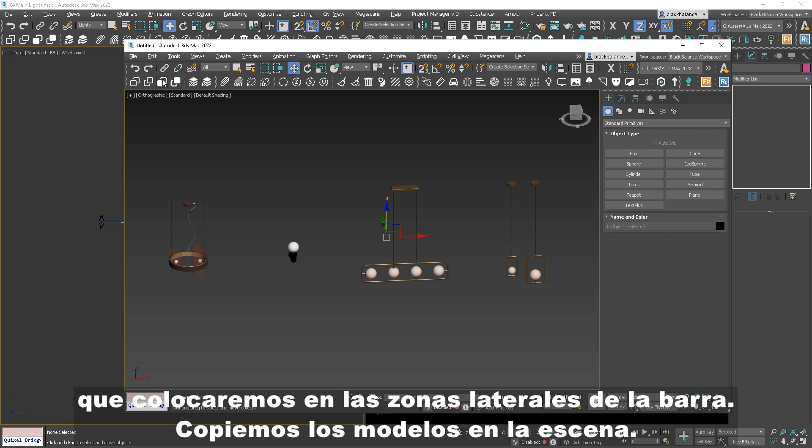So basically, we have the pendant lamp that will be placed above the sofa sets, the wall lights for the columns, and two other pendant lamps that we will position in the side areas of the bar. Let's copy the models into the scene.

First of all, let's make sure we have the light models on a separate layer. We can call it fit_lighting.

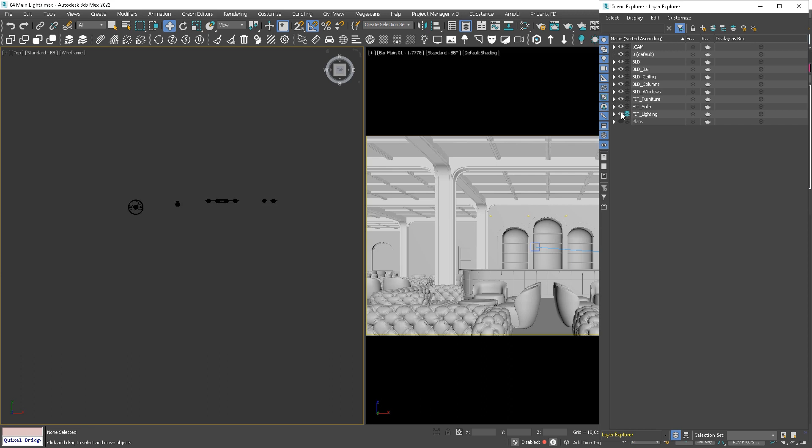Okay, let's start with the pendant light. We'll position it above the sofa set. Remember, it doesn't have to be exactly in the correct place if it's not visible. More important is to position it so it looks right on the camera and according to the composition rules.

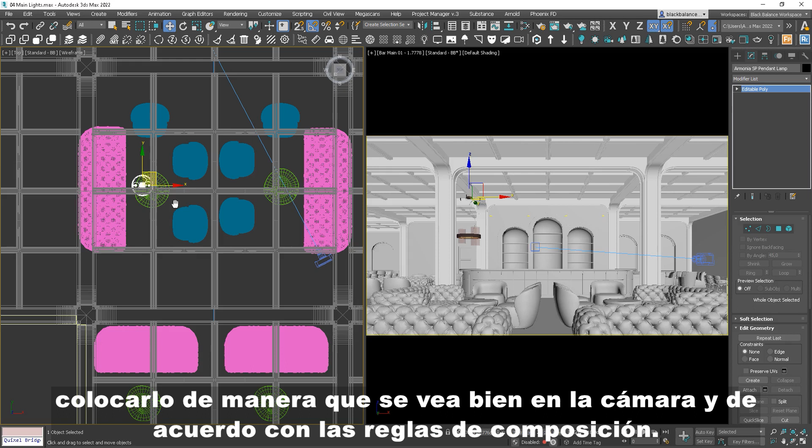Also, I like the height of the pendant lights, so I will leave it as it is. Later I will remodel them a little to go up to the ceiling. I think it looks good somewhere around here. It's nice if we have the effect of layering in the image - it looks more realistic then.

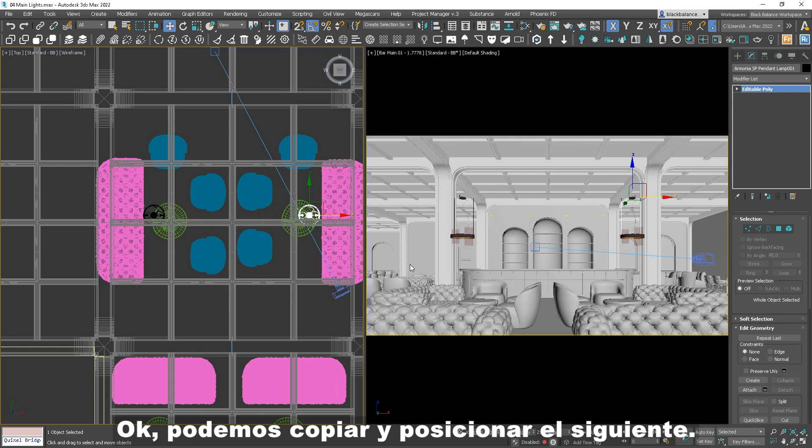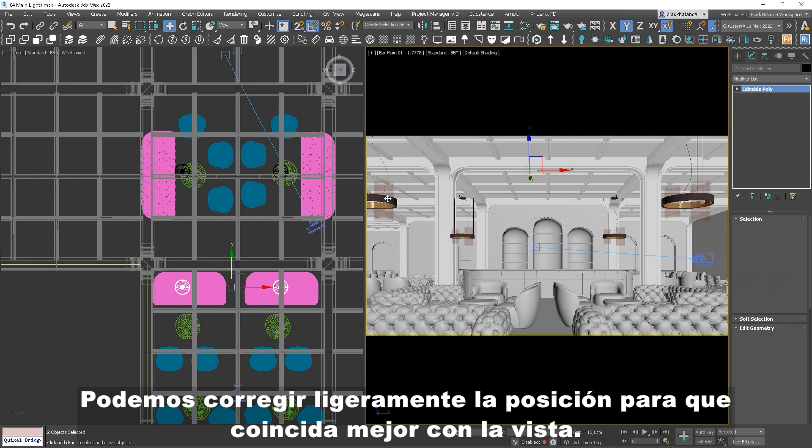Okay, we can copy and position the next one, and we can copy these two above the other sets. We can slightly correct the position to match the view better.

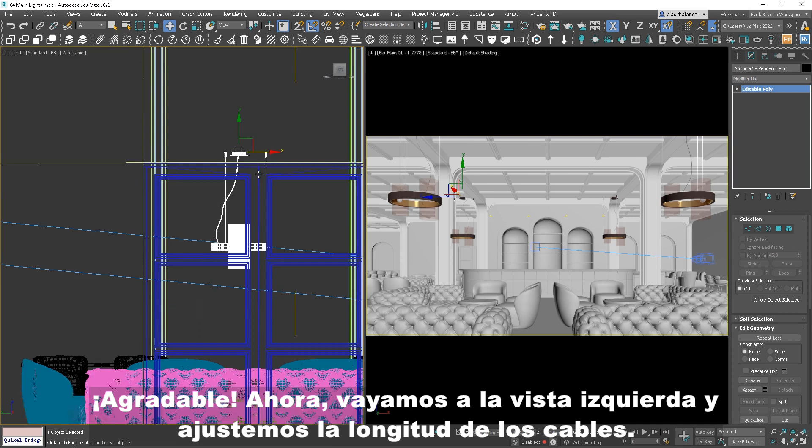Nice. Now let's go to the left view and adjust the length of the cables. I will use soft selection and move the vertices up to the ceiling. Just let me check which line here indicates the ceiling.

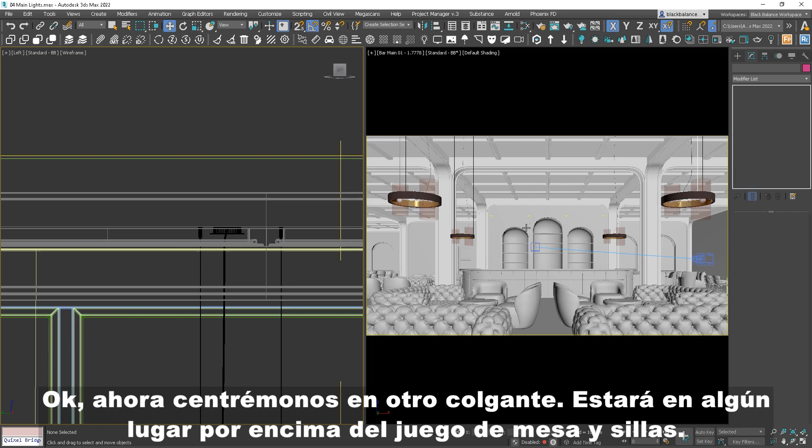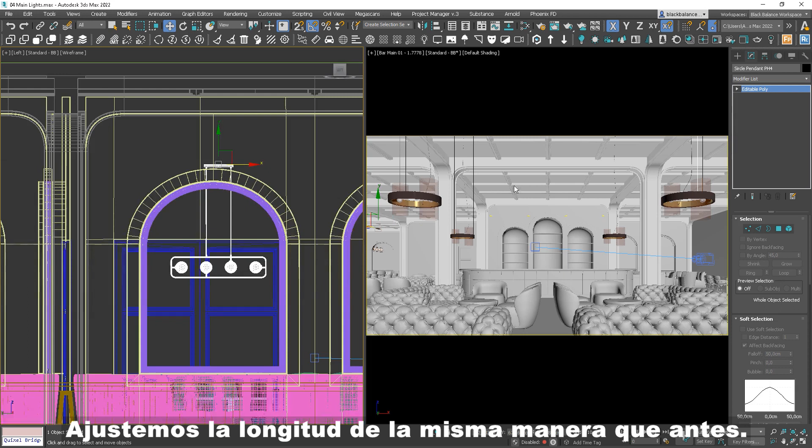Okay, now let's focus on another pendant. It will be somewhere above the table and chairs set. I will position only one of these models, as in the next lesson we'll add lights to it and copy all of this around - it will be quicker. Let's adjust the length the same way as before.

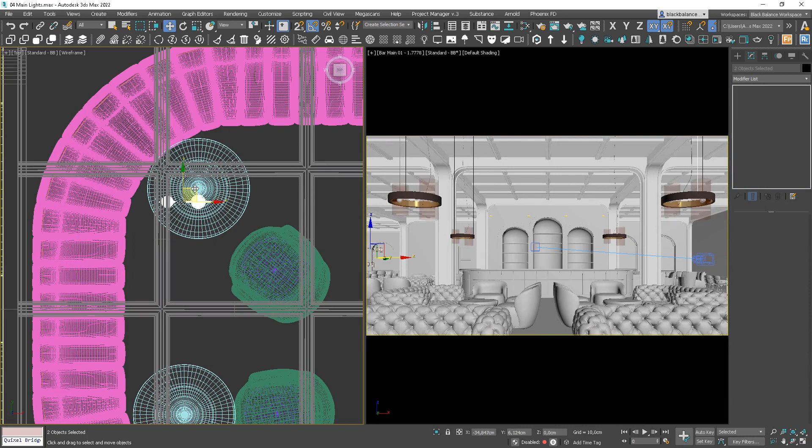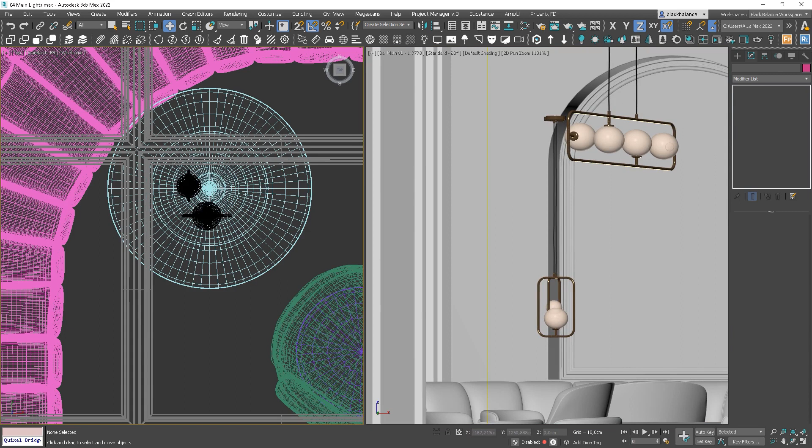And now let's position the last pendants. This I will position above the round table. Let's rotate this by 90 degrees - it will create a nice effect. I will move it slightly down, and at the end let's adjust the length here as well.

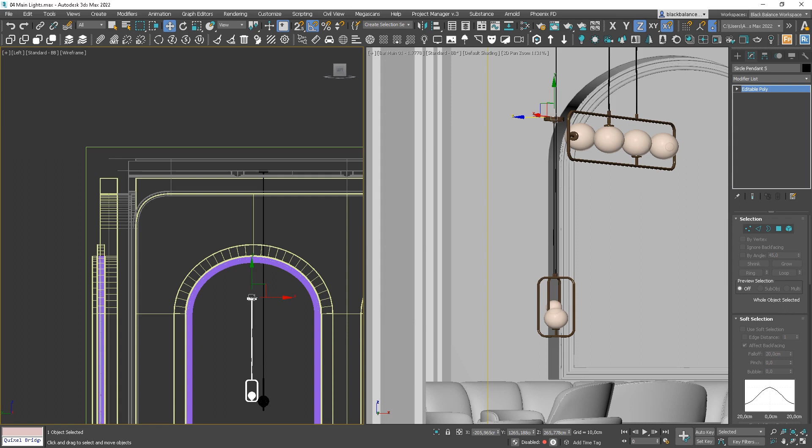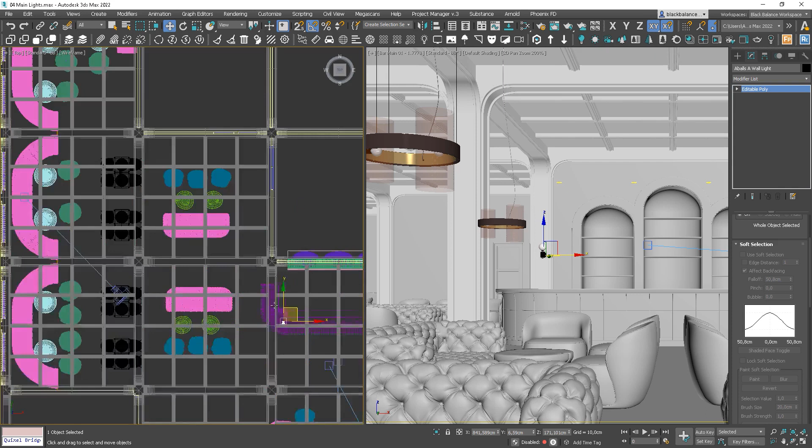Okay, now let's position the wall lights. First of all, I want it to be at the center of the column, so let's snap it to the vertex. Also, I think that it looks a bit too small.

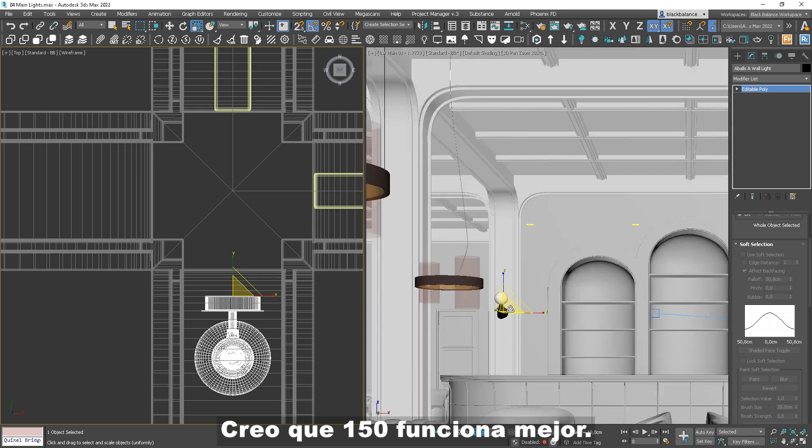Let's test different sizes - I think 150 works the best. Now let's move it back so it's actually in the right position. We can isolate the columns and the lamp to make it easier to see.

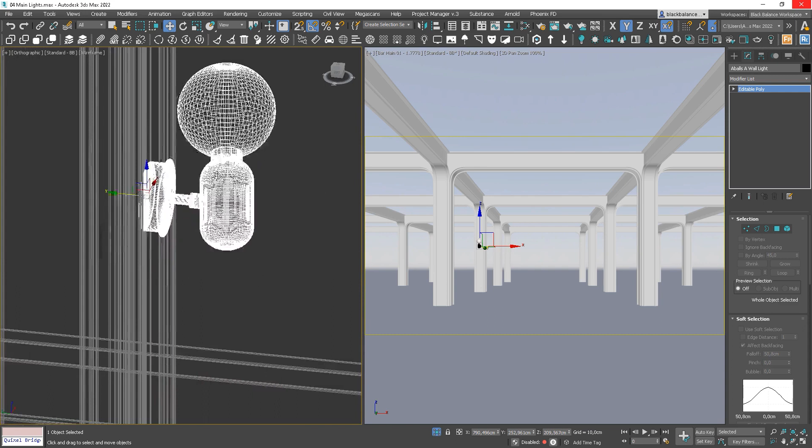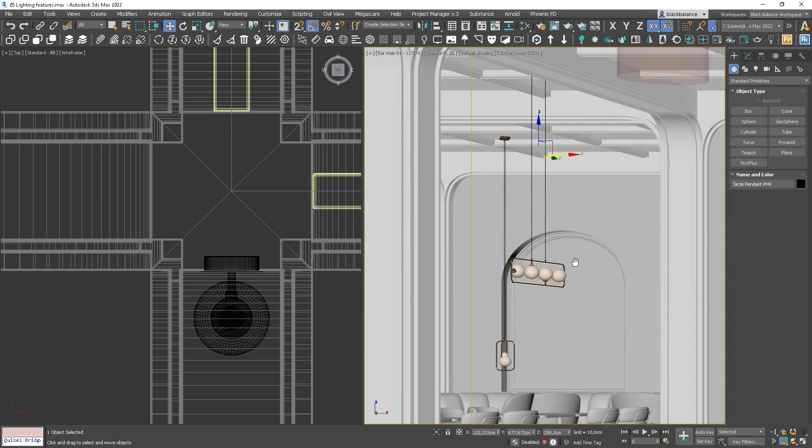We'll copy the model around in the next lesson as well. Actually, I think we can scale the pendants in the back as well. Let's try something. 125 works nice - let's adjust the position and length of the pendant.

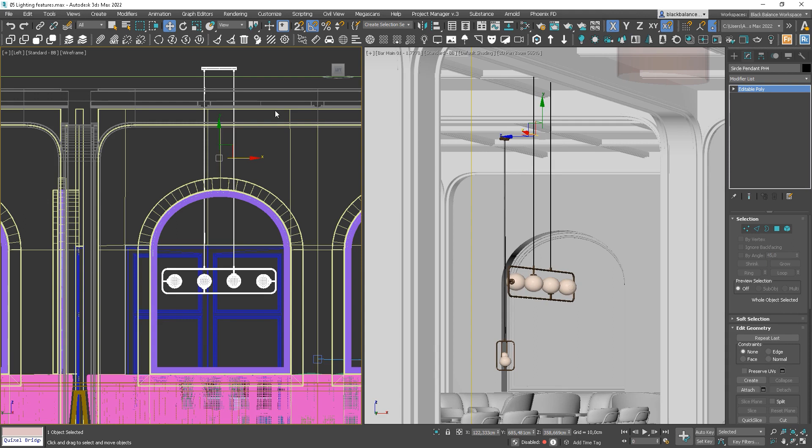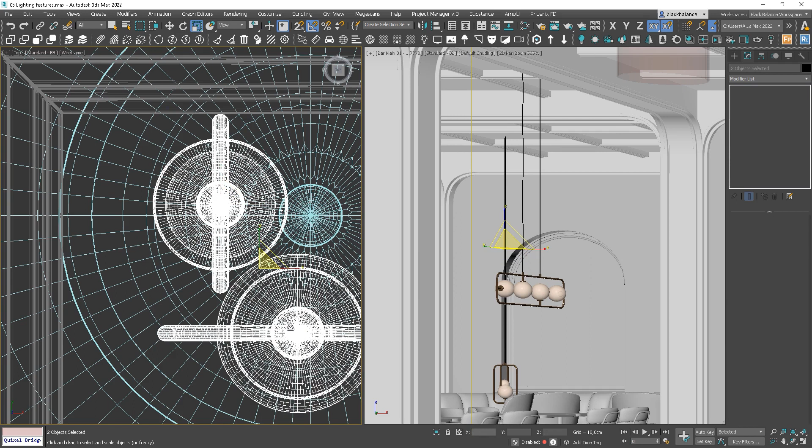Let's do the same for the other ones. In this case, maybe 130 will work better. And again, I will adjust the height and the length - the same for another pendant.

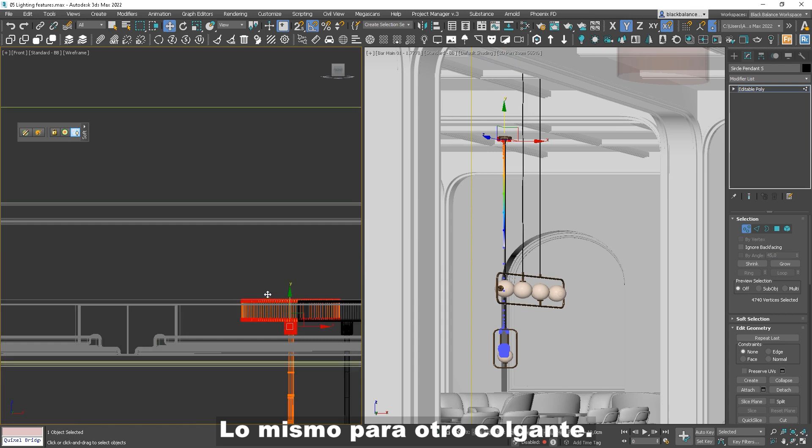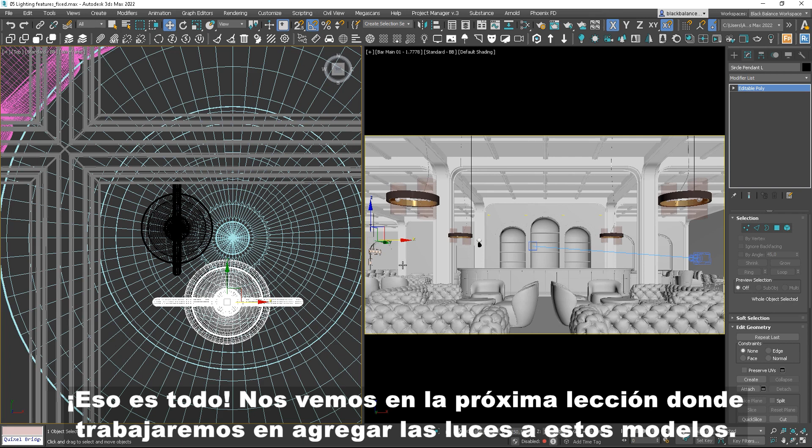And finally, I will just move the lamps a little so there is more space between them. That's it. See you in the next lesson where we'll be working on adding the lights to these models.